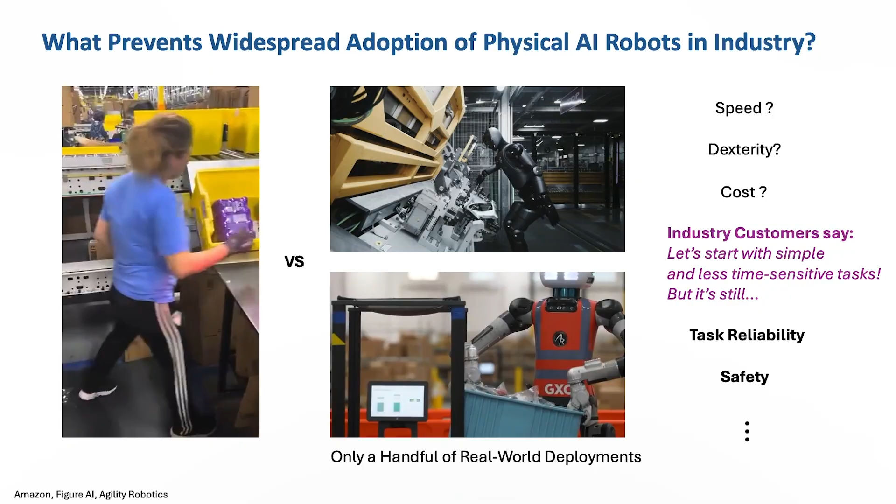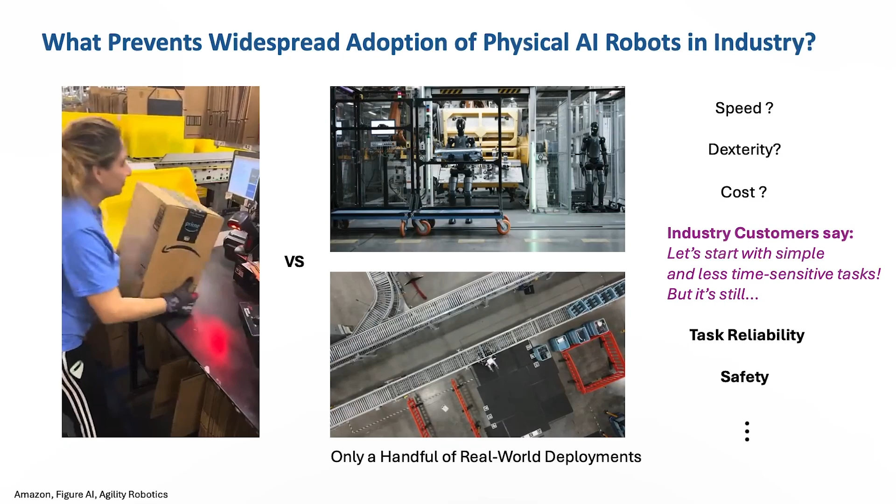Today, we see a lot of impressive videos, but most are still in pilot phases. There are a few cases out there, but even those aren't true commercial deployments yet. Yes, of course, today's robots and physical AI still fall short on speed, dexterity, and cost. We know that. But here's what's interesting. When we actually talk to industrial customers, they're more realistic than you'd expect. They're willing to start with simple, less time-sensitive tasks, but the hard requirement is reliability and safety. Those are non-negotiable.

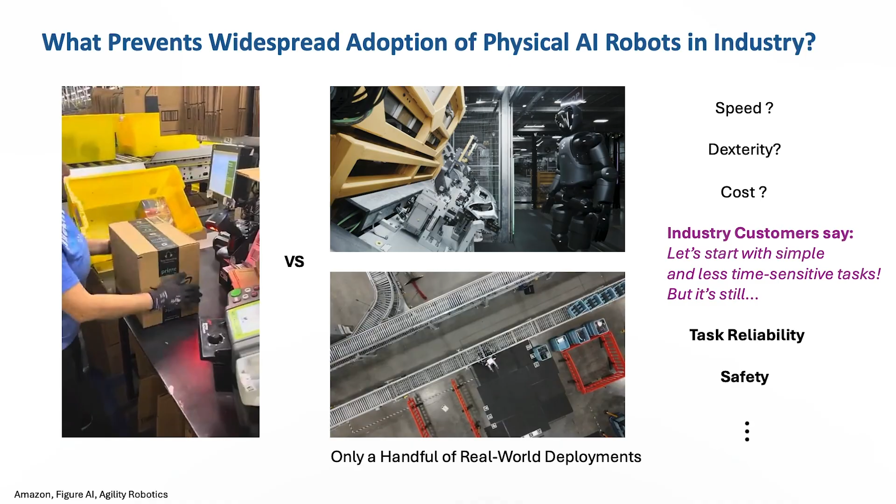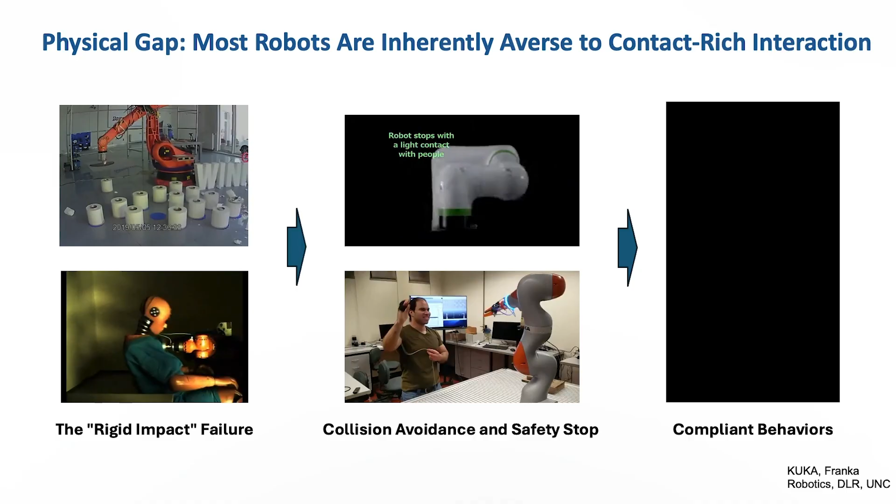One of the main technical difficulties in achieving reliability and safety is that most industrial robots are inherently averse to physical contact. Collision avoidance and safety stops lower the safety concerns, but cannot help much with contact situations. Robots need to be compliant, stable, and safe during intentional physical contact and still apply force precisely as intended. But usually, existing compliant robots come at a cost, imprecise motions and low payload, which is not practical for industrial use.

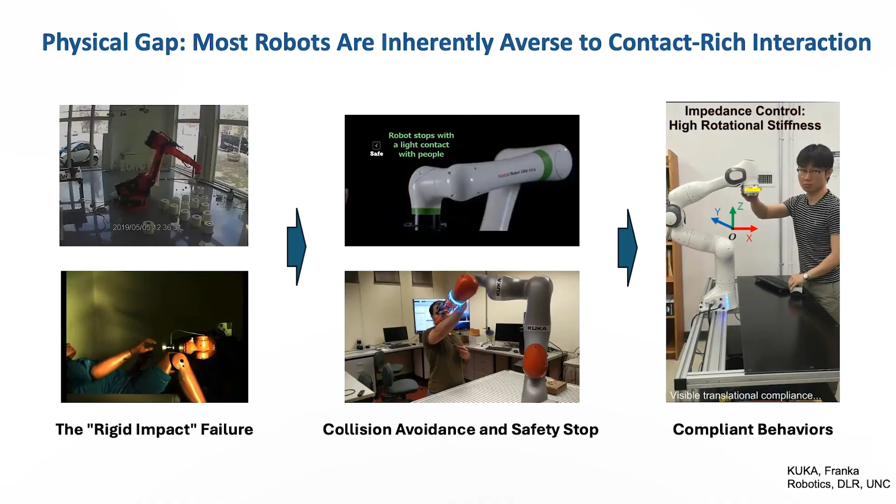There's another challenge on the learning side. Robot policies like VLAs learn mostly from visual input. And the action data they train on, position, speed, and angles, are all kinematic information conditioned on RGB images. They don't capture how hard the robot is pushing against the surface or machine. So it's like learning to play tennis just by watching YouTube. You can see the motion, but you have no feel for the ball. You're never gonna be Rafael Nadal that way, right?

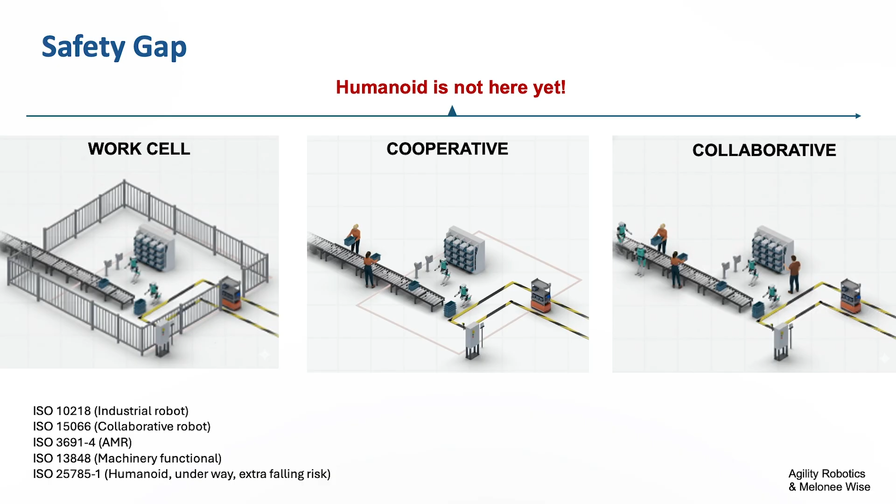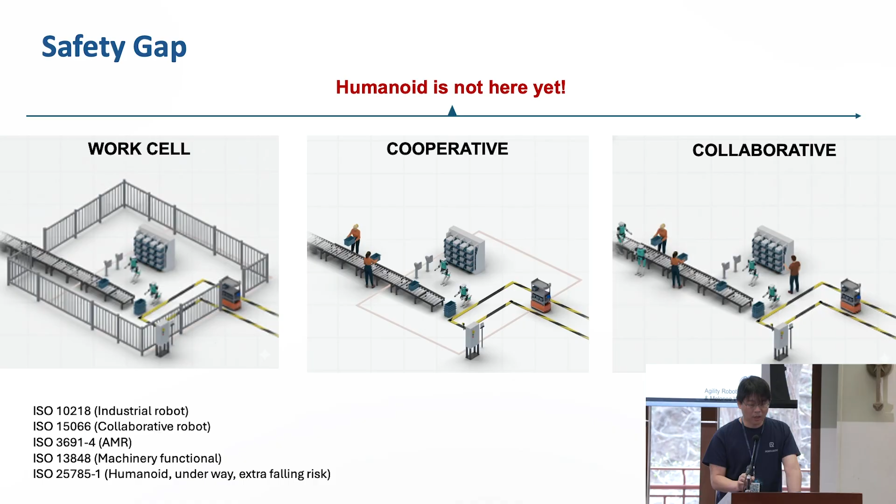And even if the robot works perfectly, you still cannot deploy commercially until you meet industrial standards. Biped humanoid robots cannot yet meet the cooperative safety criteria where robots are separated from humans with marked zones. The risk of falling itself disqualifies them. But in reality, most industrial customers don't want to redesign their floor layout. They just want to place a robot right next to a human and get started. For that, robots need to meet collaborative safety criteria where working side by side with humans is safe by design.

So what's the solution? We need two things. A robot body that's safe to physically interact with, and a robot brain that actually understands physical interaction. On the body side, soft, precise, heavy-duty force control actuation, so the robot can make stable, safe contact and apply force exactly as intended. On the brain side, the VLA model needs to learn not just what things look like, but how they feel. Force, resistance, haptics, all of it. These two have to work together.

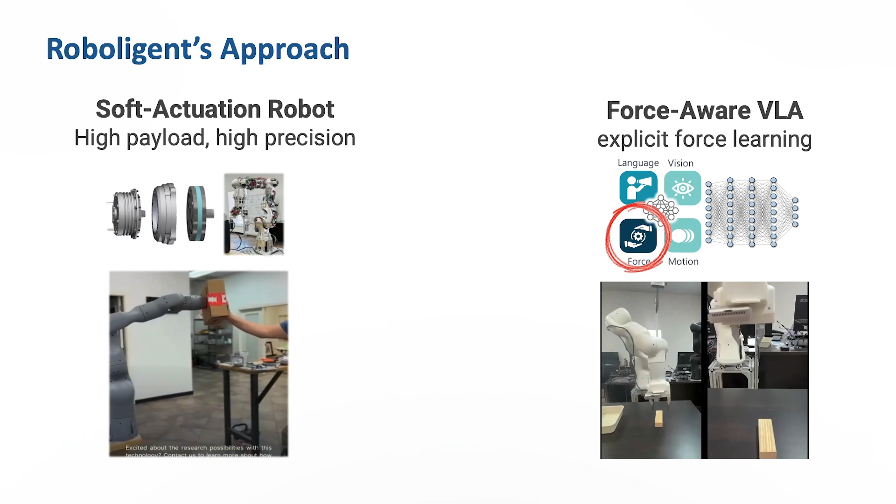At Roboligent, we built two things from the ground up, a proprietary soft actuation platform and force-aware VLA. Together, they power our robot, Robin. Robin doesn't just move to a target position, it feels and it reacts. That's what allows it to handle tasks that were previously too risky or too unreliable for robots to do. This is how we bring robot behaviors closer to how a human actually works.

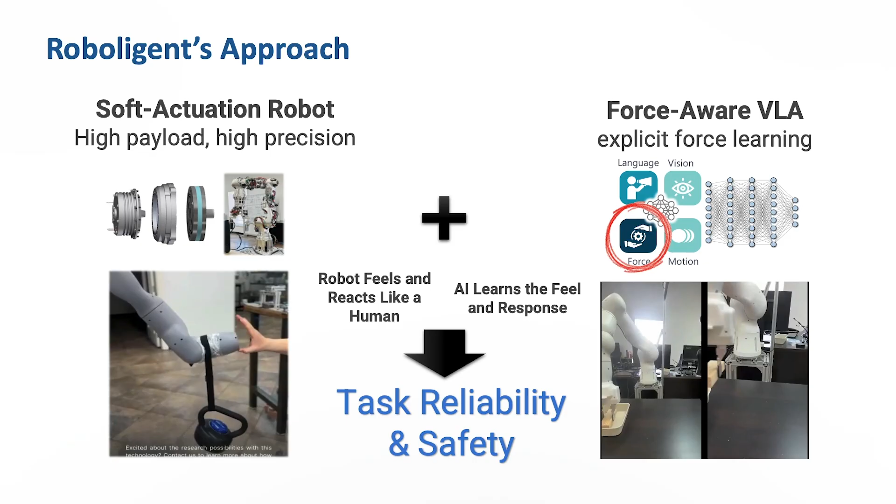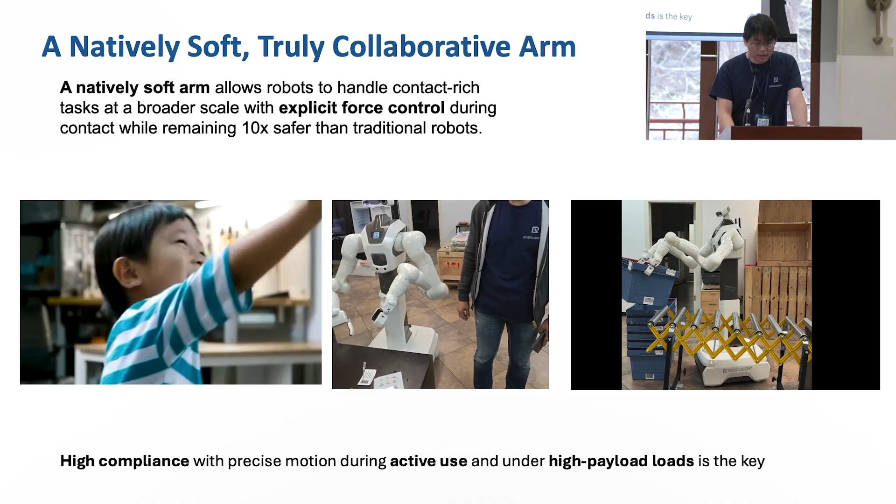A natively soft arm acts as a physical safety buffer. When something unexpected happens, and in the real world it always does, the arm absorbs it. With a traditional rigid robot, an unexpected bump like this could damage something or send the tote flying out of the gripper. Soft actuation is naturally resilient to uncertainty. It reduces impact force by up to 10 times, and that's what allows our robots to meet collaborative safety standards.

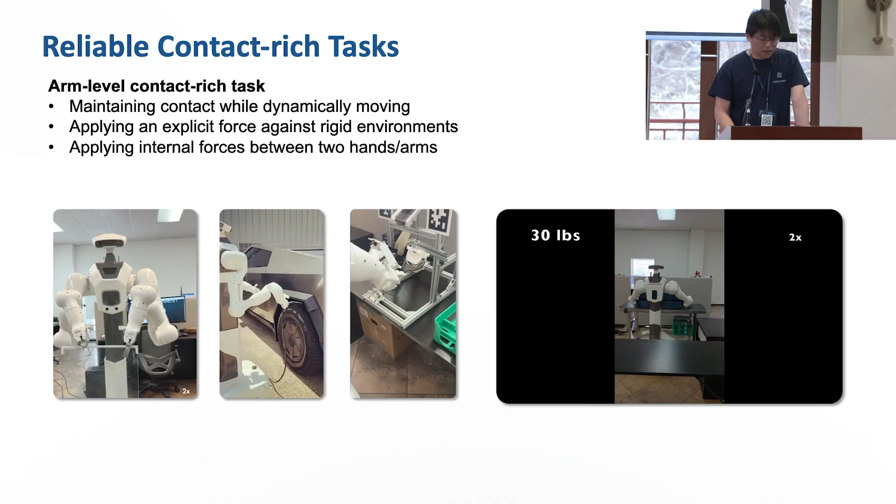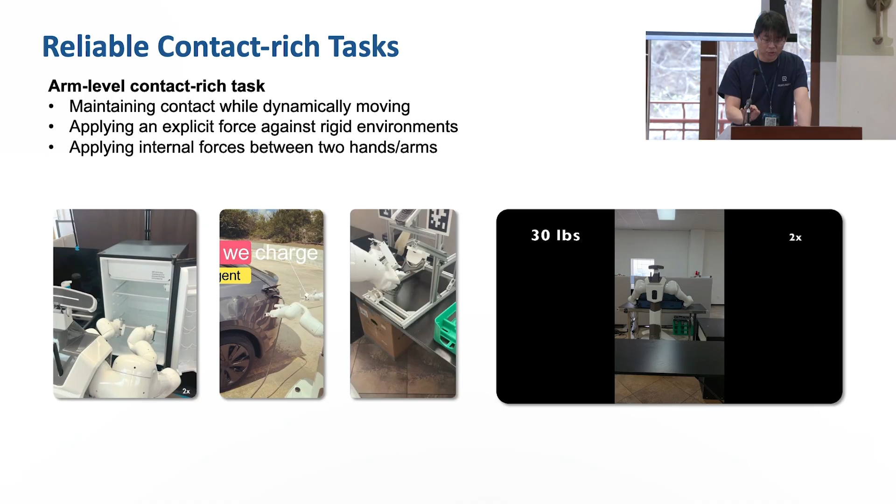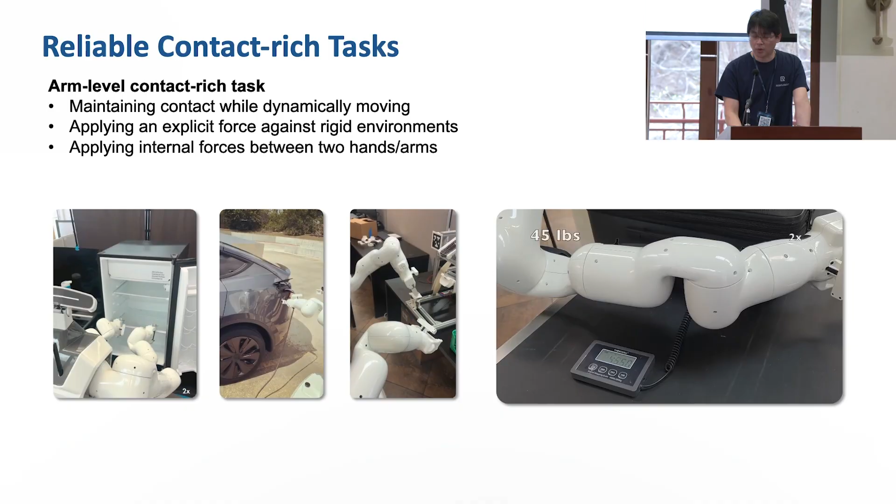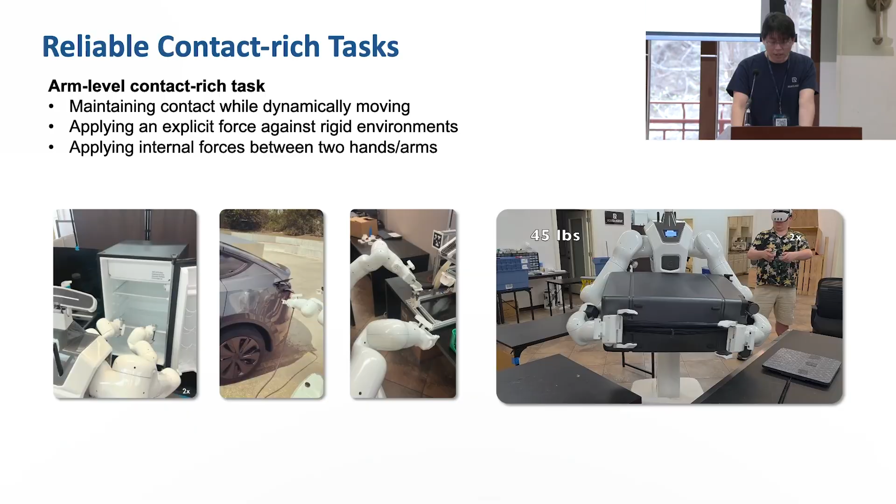Now let's see soft actuation in action across different contact-rich tasks. Sliding a glass plate into a tight space, inserting a charger, these tasks require the robot to follow a constrained path while keeping contact forces under control, something robots struggle to do safely. Or assembly, pressing parts together with precisely the right amount of force, or lifting a heavy box by hugging it, where both arms need to squeeze, coordinate, and balance the load together. These are exactly the kinds of tasks where soft actuation makes the difference.

But a better robot body alone isn't enough to achieve industrial reliability. We also need to rethink how we develop physical AI for industry. Most big lab VLAs target general purpose autonomy, but in practice, that often means low per-task success rates, which doesn't work in industrial settings. In industry, what matters is task success, deterministic behavior, and tight synchronization with the environment, including equipment, sensors, and task management systems. So instead of chasing general autonomy, we think the better path is a small and data-efficient VLA integrated with deterministic task planners like finite state machines or behavior trees.

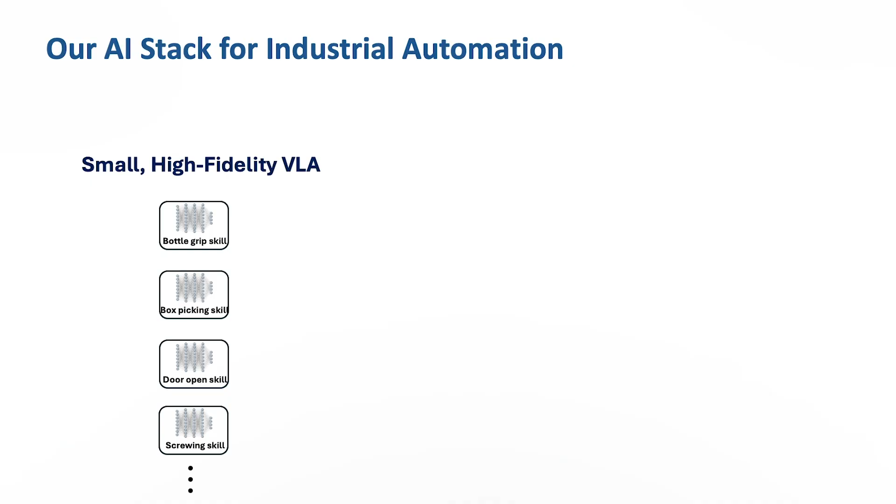Following this design philosophy, our AI stack combines a small and high-fidelity VLA with deterministic execution logic. The VLA is small and focused, trained on specific industrial skills like gripping, picking, and screwing. Pair it with the execution logic, and you get the adaptability of AI with the reliability the industry actually needs. High success rates with far less data to get there.

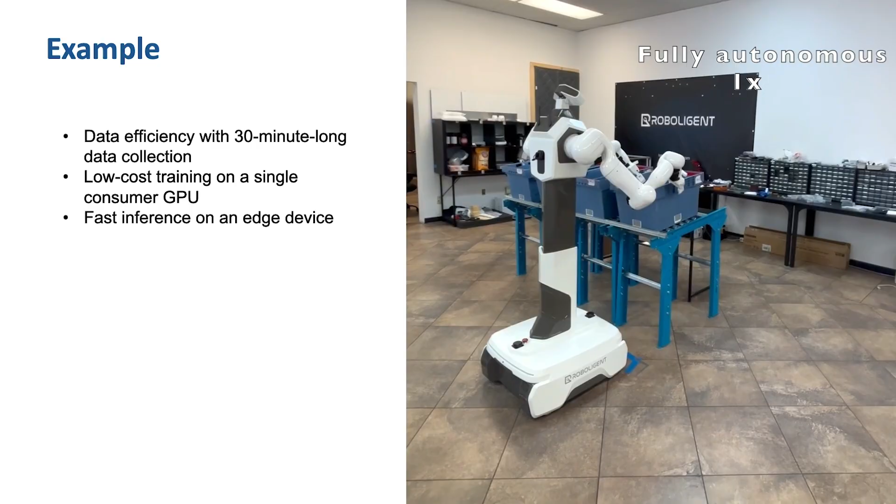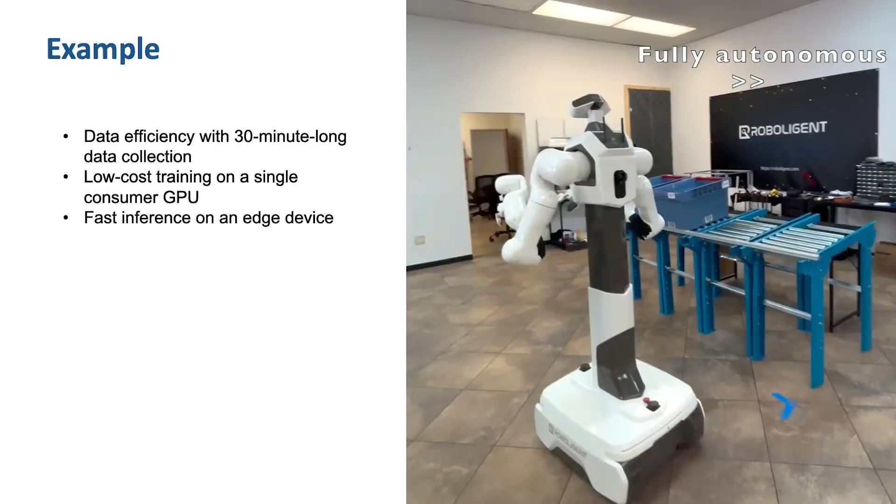Let me show you Robin in action. This is a fulfillment center task, part of a real industrial workflow replicated in our lab. What you're seeing is our small force-aware VLA running on Robin, organized by deterministic execution logic, trained on just 200 episodes, about 30 minutes of demonstration data.

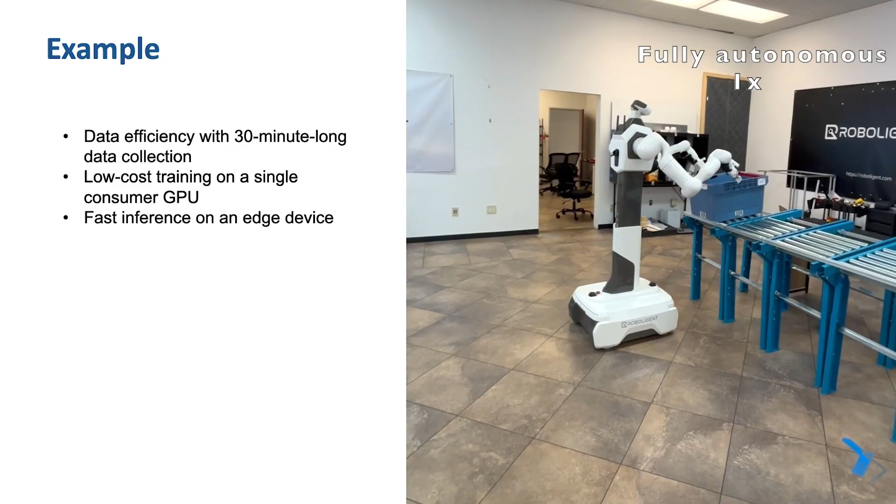And notice this picking motion here is fast. It's running inference on the local onboard machine. This is what data-efficient, industry-focused physical AI looks like in practice.

Before we wrap up, let me give you a quick look under the hood of our force-aware VLA. We use a small VLM with a DiT action block, taking image, language, and proprioception, including force data. The core innovation is our haptic flow matching loss term. We train a haptic field that captures the expected force trajectory during successful task execution. At inference time, deviation from this field triggers real-time motion correction.

So let me wrap up. Today's physical AI robots have vision, language, and action, but force and tactile feedback, the missing modality, is what contact-rich tasks actually need. Industry isn't necessarily asking for general autonomy. They want guaranteed, reliable, and safe automation. Reliability above 99%, safety compliance, and deployment that fits into existing workflows without disruption.

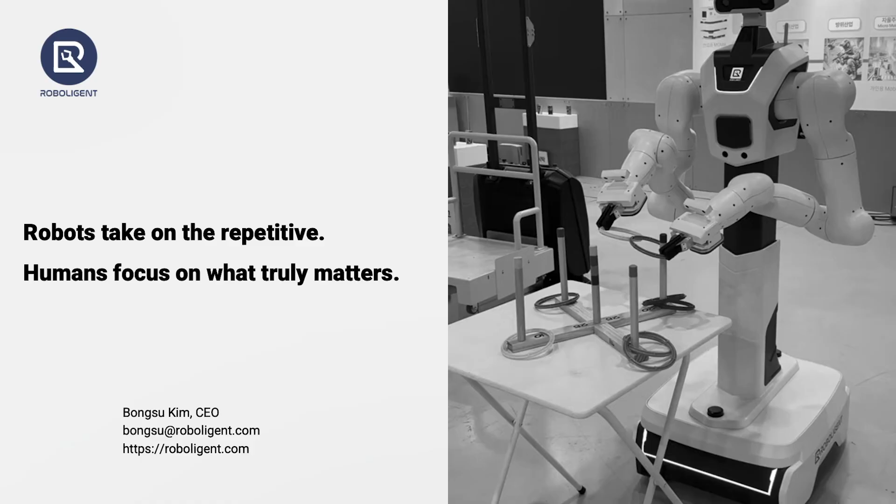Any questions? So, there are all these dynamics of economies of scale, and depending on where you go, hospitals, manufacturing, homes, pricing changes dramatically. So, do you see a path to the prices that a lot of households and industrial setups demand? Or do you think there's going to be a dramatic difference in pricing depending on the region?

And then if we go really very low cost in robotics, the margins are going to be very slim, and we know that sometimes we don't like it in the U.S. Well, we don't like it, right? Yeah. So do you think that we're going to have kind of a race to the bottom, and somehow that's going to have a correction because of the large quantities of robots that we're going to be selling?

So you're asking how the cost structure these days plays a role in different regions of the industry, and how we can anticipate wider dissemination, overcoming the cost challenges. I think that's what robotics companies these days are really trying to solve. The first approach is mass production. A couple of big companies are doing thousands of units of production. Still, that production cost is over, I would say, $100,000, $200,000, something like that.